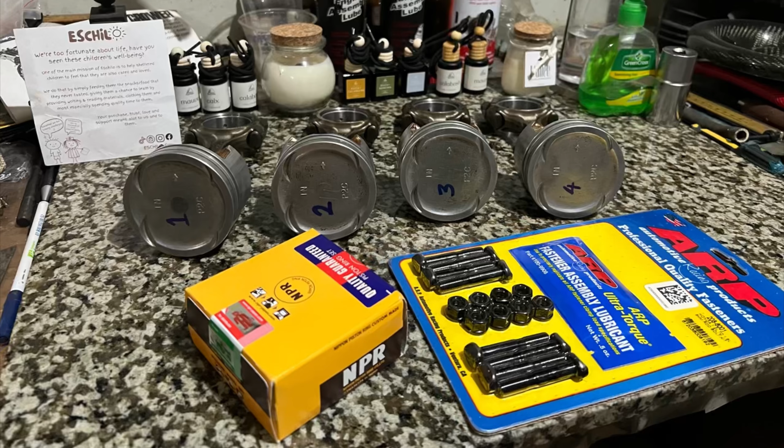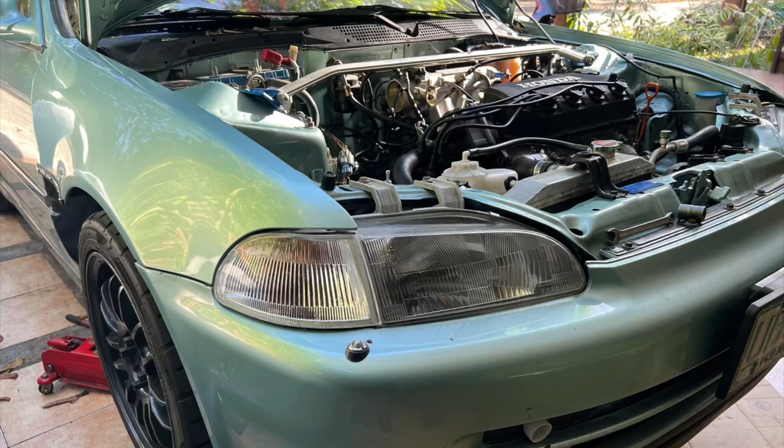Some of you may remember Marvin's circuit racer, the one he uses the Petron bracket in Grid Race Championships. Yes, this one. On the first episode, we disassembled it and prepped the stock pistons because the block remained stock, then assembled it. In part two, we assembled it further, installed it back in the car, got it ready, and started it up. The tune up was the third episode.

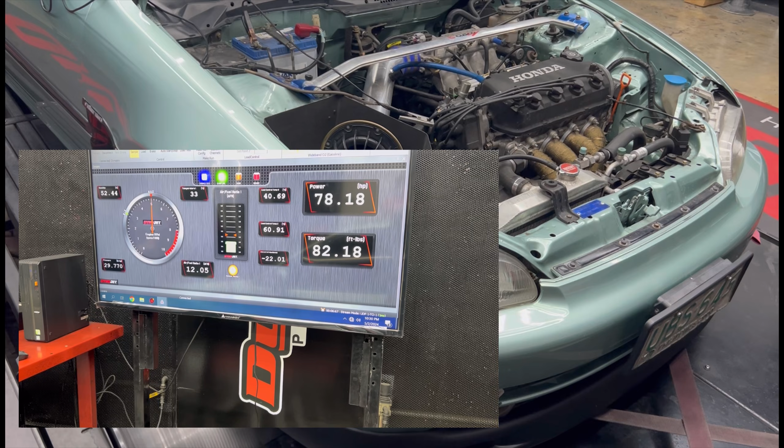Now we're here at Dyno Pro Philippines, but this time at their Sucat, Parañaque facility, a different branch than the one we go to on Mindanao Avenue. Here we'll talk about the limits of the exhaust and what it affects on the induction, whether it gains or not, we will see. So let's go, let's go.

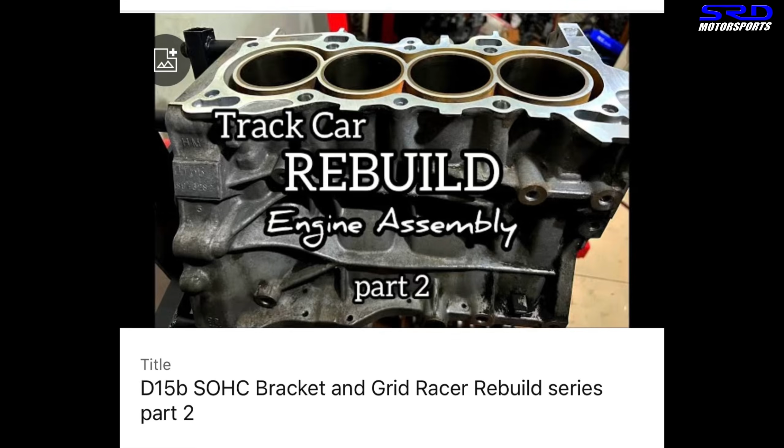In part 2, we were already assembling the engine because we already talked about the things we're going to do on a stock block, on a stock engine. And in part 3, we installed it, did the startup, running, and tuning. So it was all good, right?

So now here we are at Dyno Pro Philippines' Sucat, Parañaque branch. Marvin asked us if we could dyno here because Marvin and his crew are from Batangas City and they drive an hour and a half to the city. Mindanao Avenue is further up north, but for us, the distance to both branches is about the same, so we're situated in the middle and were totally fine with it.

So here they are getting the engine ready. The car is about to get its front wheels changed because it's running 16s and that's quite heavy. Now they've got 15s on it, so it's pretty good.

Now lining up the car to the dyno cell. Yes, now it's all very good.

The crew at Dyno Pro asked us if we could wait a bit because they're finishing a dyno run on a Kawasaki Ninja H2. That was pretty cool, we just waited around because all their crew was concentrating on the dyno cell for the motorbike. So that's fine, we just made sure everything was ready on the car and the laptop and all the other stuff.

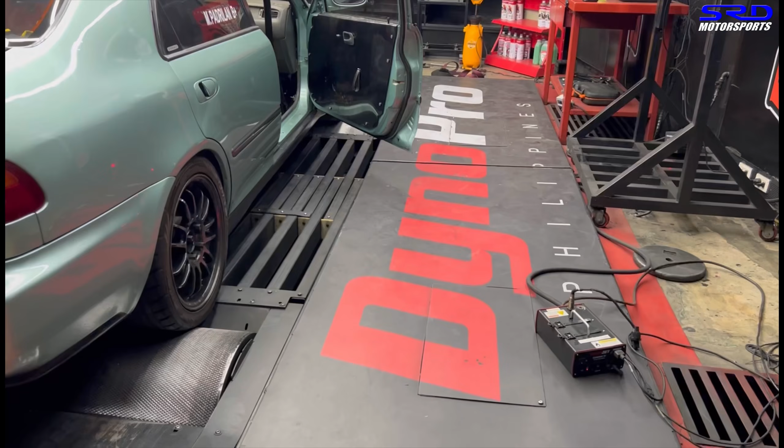Here it is, getting ready to rumble. As you can see, full exhaust with a chambered muffler, that's why this sounds good. 15s up front, Marvin's EG looks really good, well taken care of, and you won't imagine this is actually a circuit racer. It looks real fresh, right? Yes, look at that. Four doors are always really looking cool in my book. There are too many hatchbacks and not enough four doors running this decent and looking this good, so this one wins in my book.

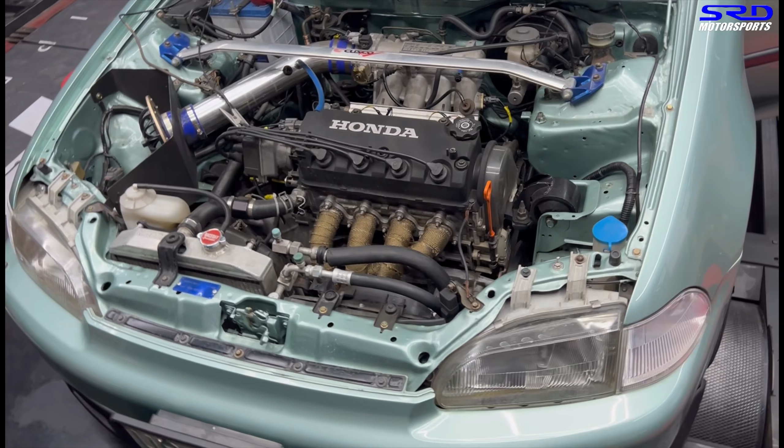Okay, now let's check out the engine bay here. We've got to dyno it with the short ram intake and the filter that he runs on track because this is how he circuit races it, so we've got to make sure the power is there on how it's set up at the track. Now here it is, all strapped up.

You can see the dyno cells are closed so it doesn't make noise outside. Yes, all strapped and ready.

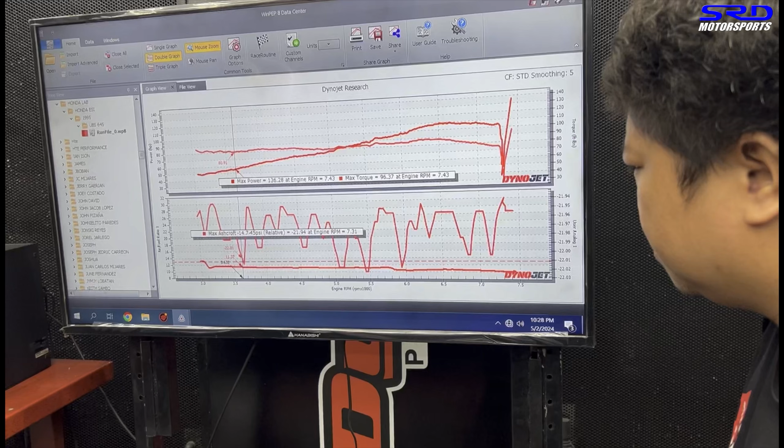Okay, this seems erroneous because there's a spike at the tip of the run. So yes, this time we go with low cam only, just to see the Vtec engagement.

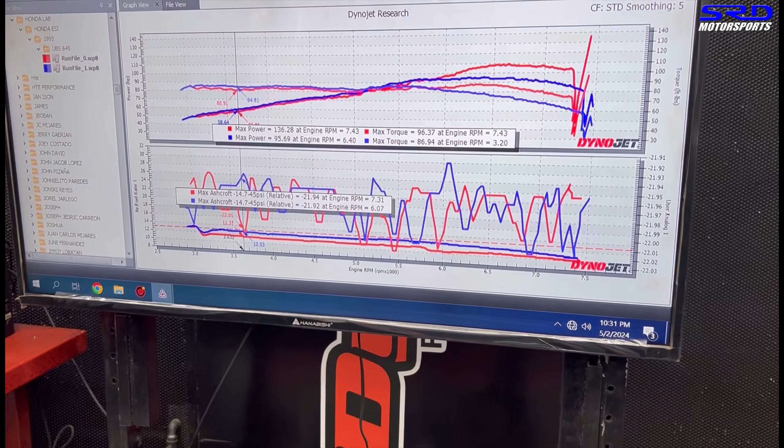Oh, not bad. We got 95 wheel horsepower. This is non-VTEC, just a low cam. So it's 95 wheel horsepower. We know we're gonna put the VTEC around 5.2. So now let's do it.

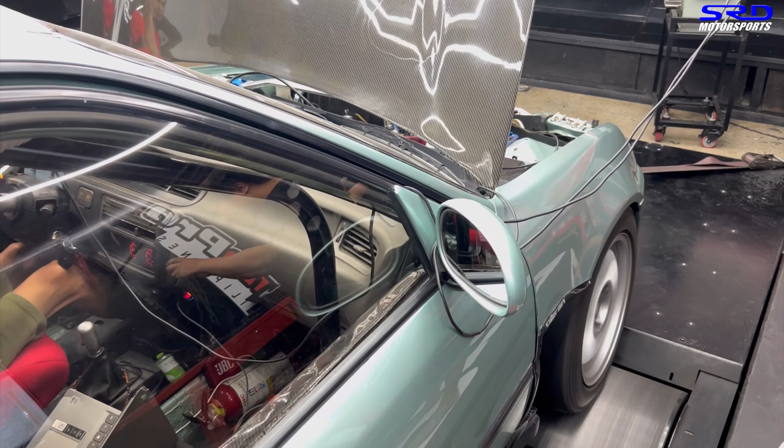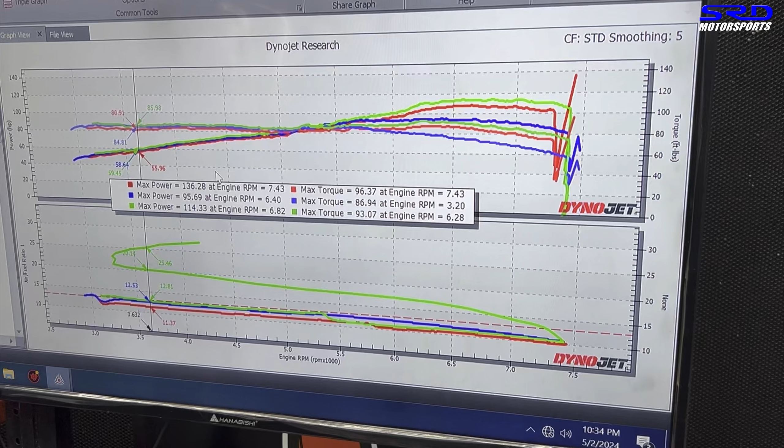Let's check. Oh, 114 wheel horsepower. That's not bad for 1500, that's stock. Hey, that's pretty cool. So now let's continue tweaking it. Let's continue with another one.

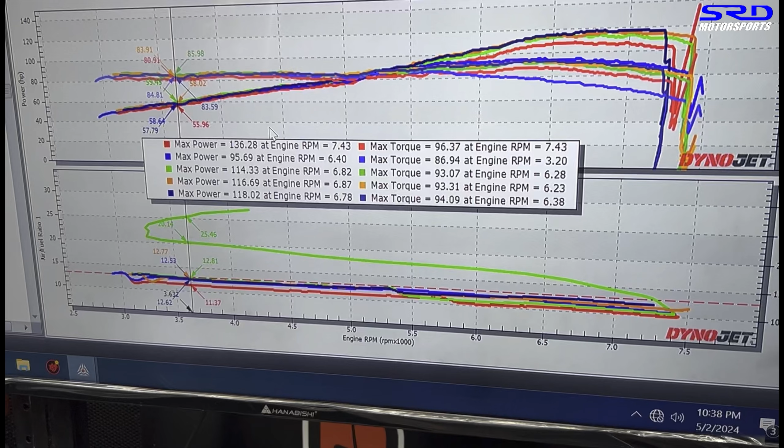Oh, this is nice, 118 wheel horsepower. That's definitely not bad for a 1500, right? So now let's tweak the timing a bit and the air fuel. Let's see how it goes and how the engine likes it. Let's make a few runs. Go.

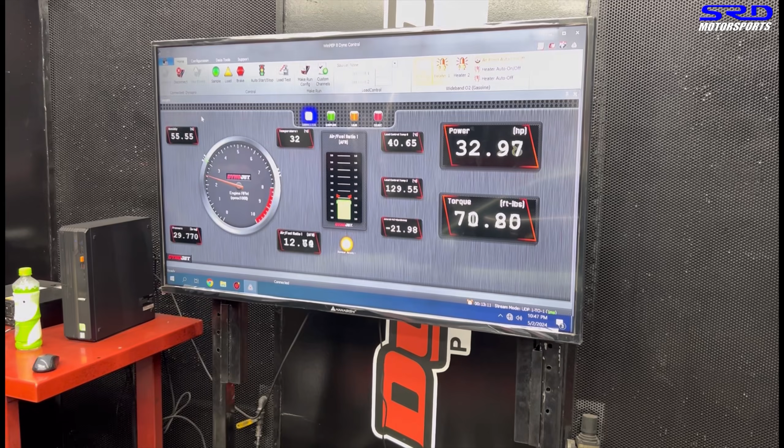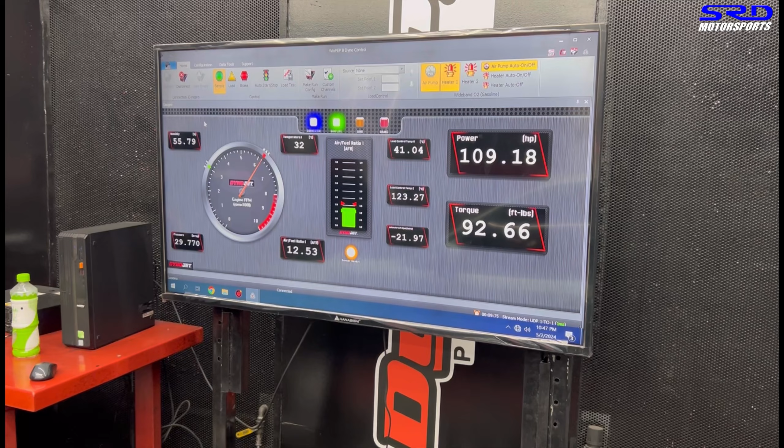Okay, here we are. We got, let me see, 120 wheel horsepower. The last one is 119.6, so it's like the 120. All right, so now to squeeze it a little more, we gotta try my ram air system.

Okay, here my colleague is removing the air filter. So we can put the ram air extension and the velocity stack. Here it is, yes. Okay, now let's see.

Let's make a few runs and see how it goes. All right, still strapped in, so we're gonna just keep going now. It's actually on idle. Yep, so here we go. Let's go, let's go.

All right. Okay, interesting, it still made 120 wheel horsepower.

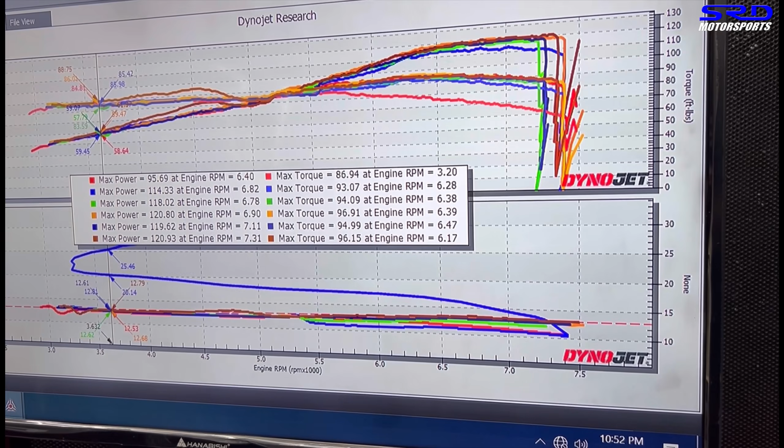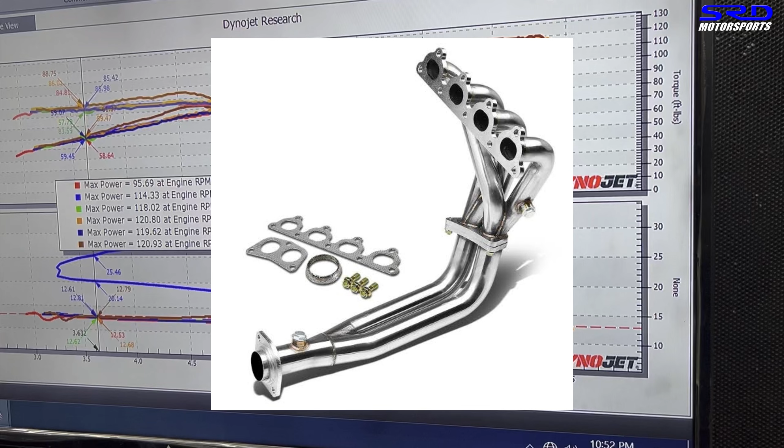That means the exhaust is restrictive, and we know this is running a 2-inch exhaust, that's 50 millimeter. It needs at least a 60 or 2 and 3/8, or better 2.5 inch, because it's running this header, and we always modify this with a 2.5 collector.

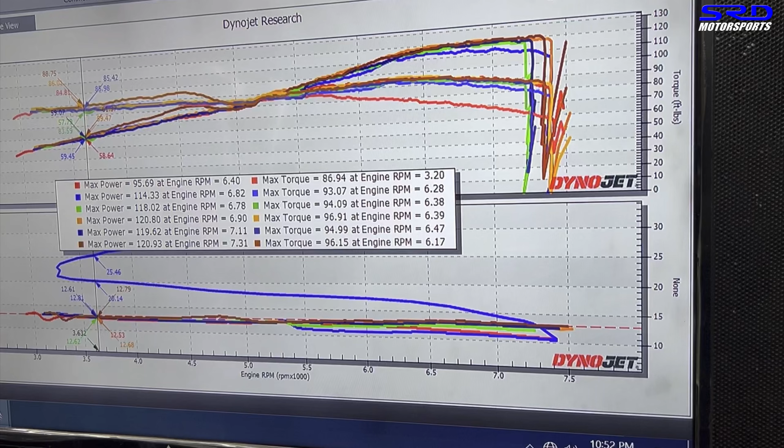And it always ran good with a 2.5 collector and of course 2.5 piping. Running a restrictive exhaust also means you're generating more heat when you tune it a bit leaner, or not too rich. Your tuner's gotta know that, because if he doesn't, you have to reconsider — unless you melt the piston and just call it bad luck, right? Okay, let's continue.

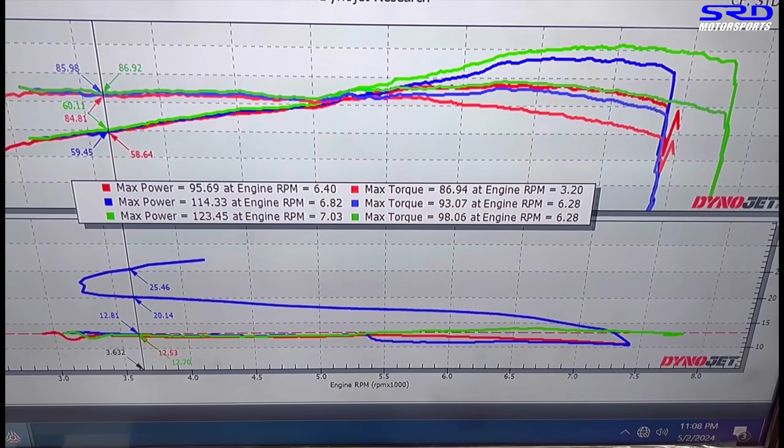Oh yeah, okay, now let's clear the dyno. Here it is, the best one is 123.45 wheel horsepower. That's not bad for a D15B stock block, an LXI style block with the P2C pistons.

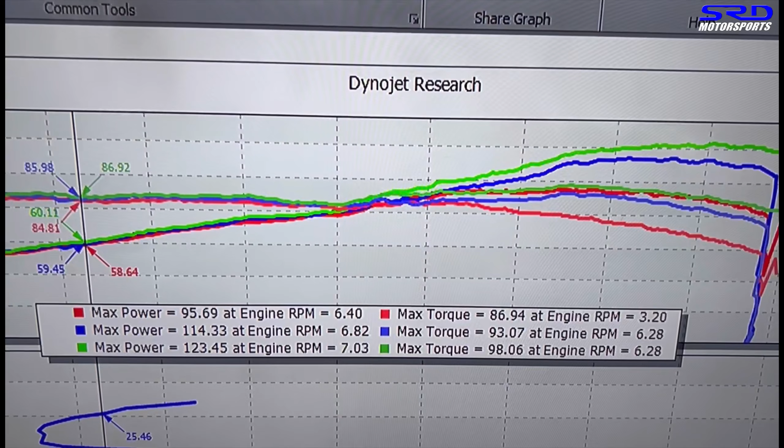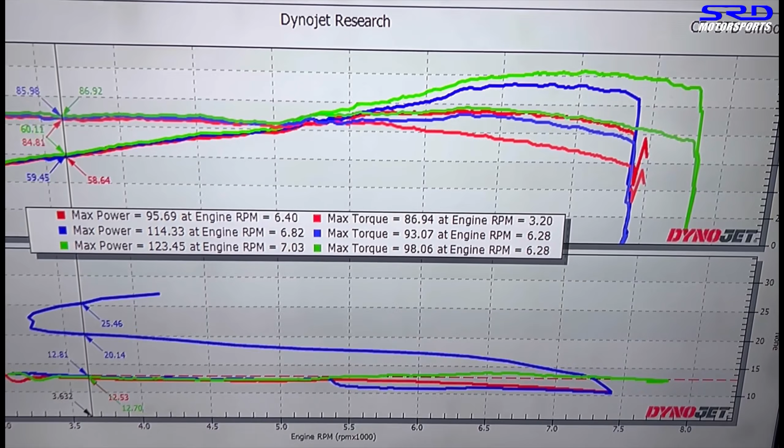Here it is, the first one is non-VTEC, 95.69. But look at the graph, that's pretty decent and pretty good. And of course, you can see the top end, the peak power is from 6.5 all the way to 7.5. It's kind of plateauing, so this is gonna be pulling good times at the track because this is gonna pull really good and really hard.

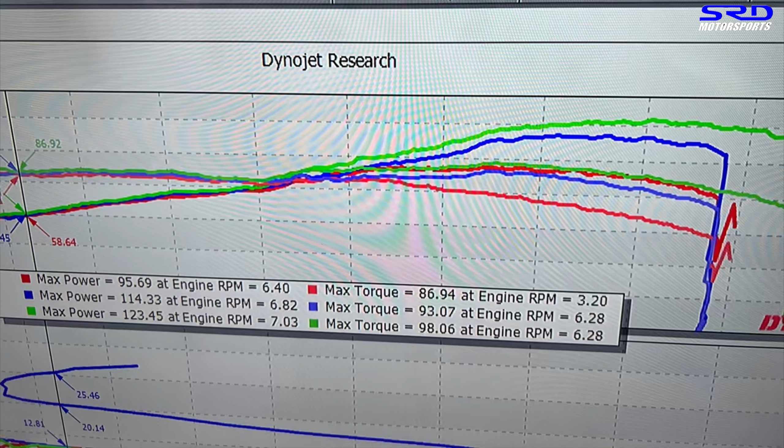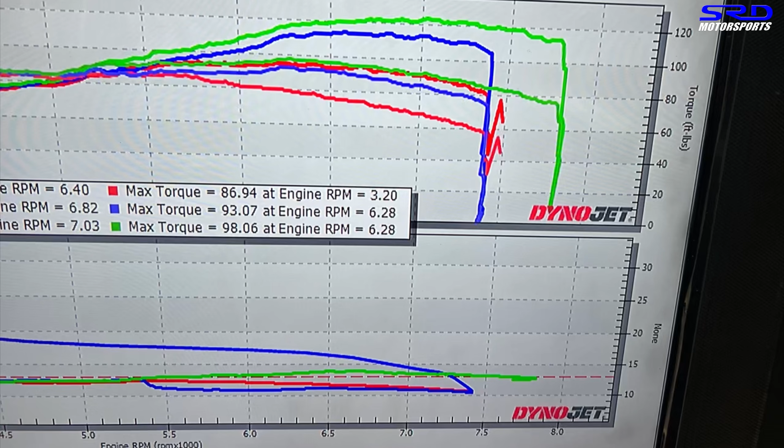And of course, Marvin told me he just shifts around 7.5, but this one now has a rev limit of 8,000, so he's free to drive it however he wants, or adjust his driving for the rev limiter needed for a certain lap time. But good job to Marvin for having a clean car.